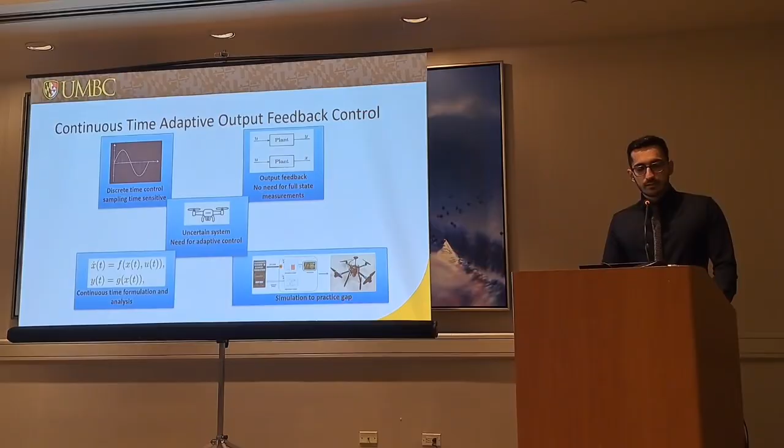So we are dealing with uncertain systems. Discrete time controllers are sensitive to sampling time, and the problem that we have with full state feedback controllers is that we need to have full measurement of the state, while on the other hand, output feedback controllers only require measurements of output.

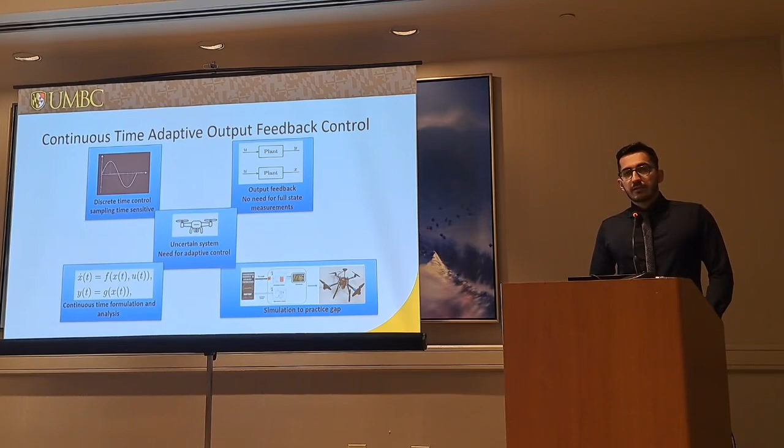Having a continuous time formulation eases the analysis when we have a continuous time model and we want to implement a continuous time controller. And we can also eliminate the problem that arises in the simulation-to-real gap.

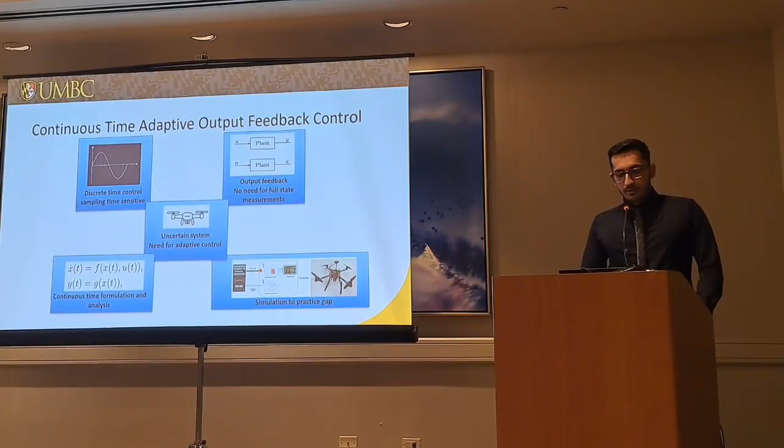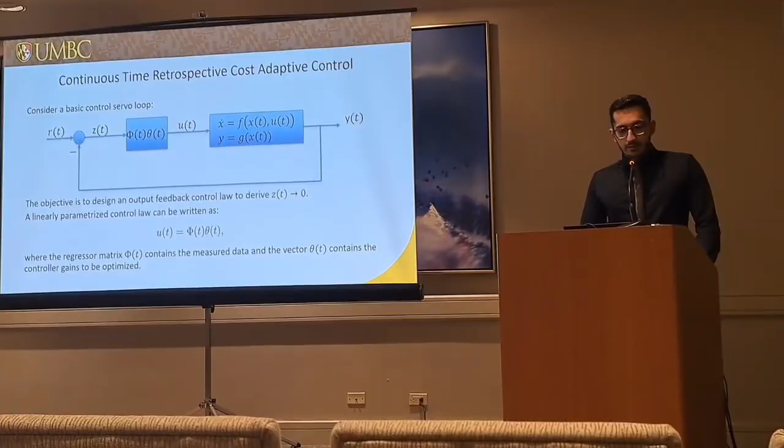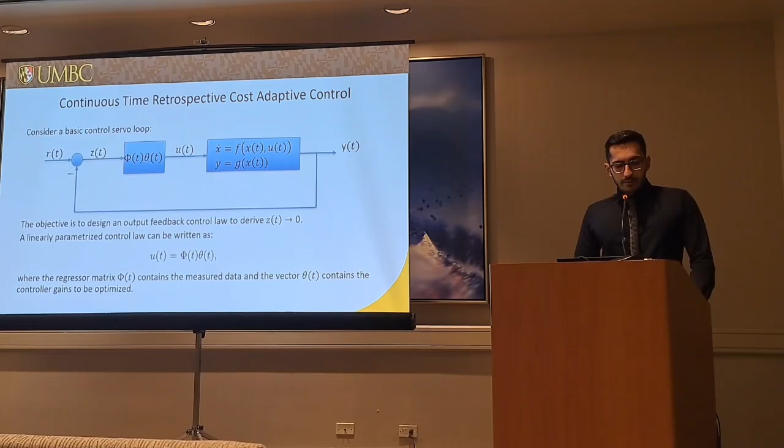So consider a basic control servo loop where we have a plant. The plant is unknown; we don't know the dynamics or parameters of the model, and we want to drive the output of the model to a reference. So here we are defining the reference signal with R of t, and the objective is to bring the error between output and reference to 0.

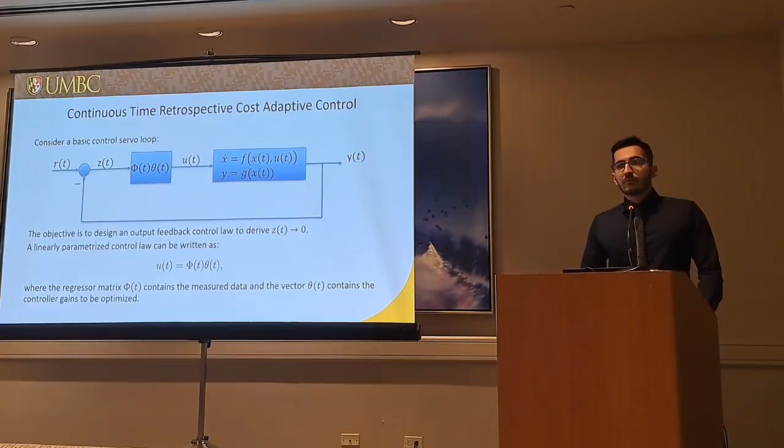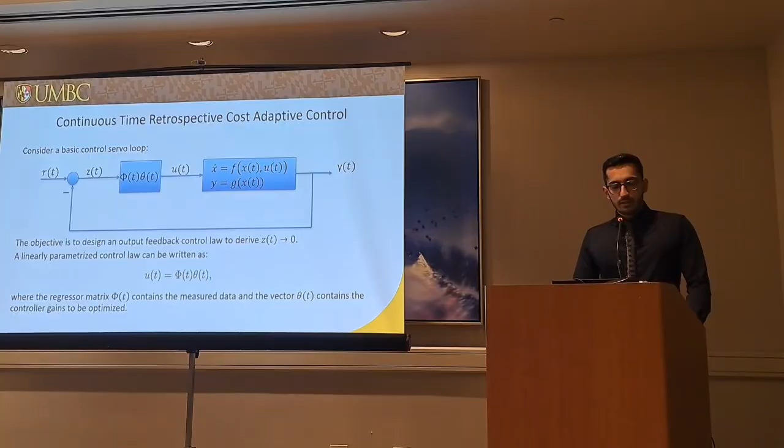And we want to use a linear controller, and any linearly parameterized controller can be written as U of t equals phi of t times theta of t, where phi of t is the regressor matrix, and theta of t is the vector of gains.

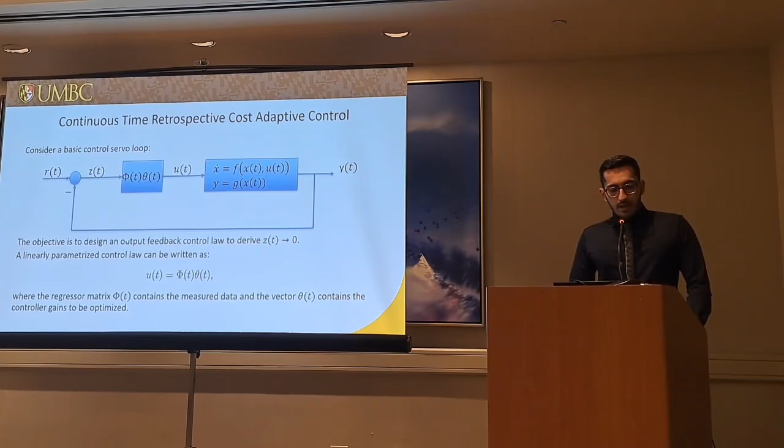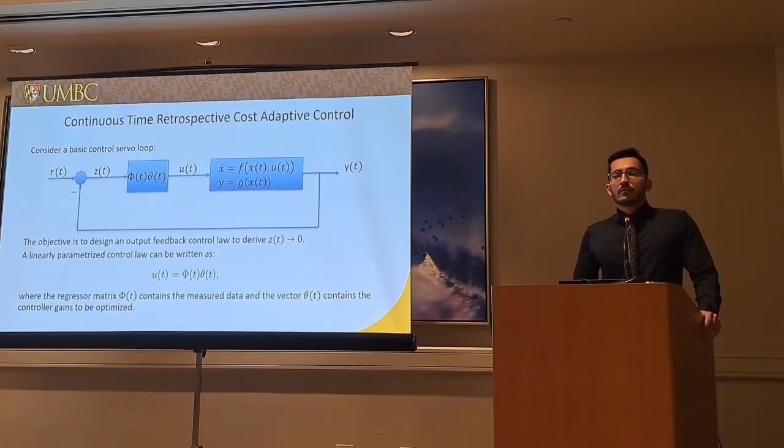So the regressor depends on the controller that we are using, and it can include integrals of output, integrals of control signal. It depends on what controller we're using, and this method is applicable to linear controllers, so we can mention PID controllers, full state feedback controllers, and cascade PI controllers.

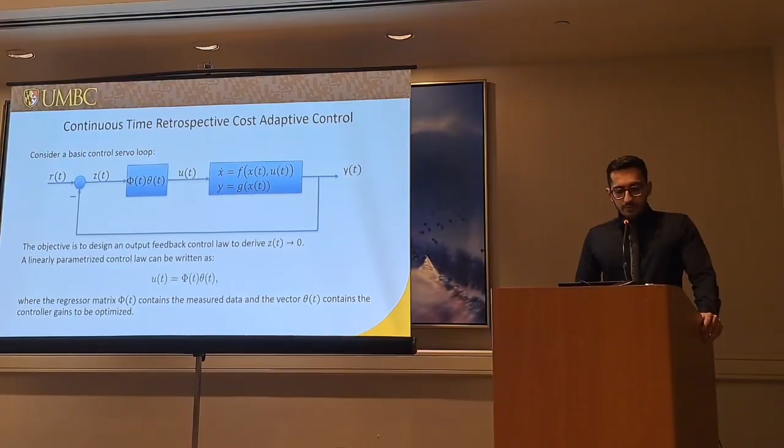So the objective is to develop a continuous time adaptive method that can adapt the vector of gains, theta of t, and the objective is to achieve stabilization and tracking performance.

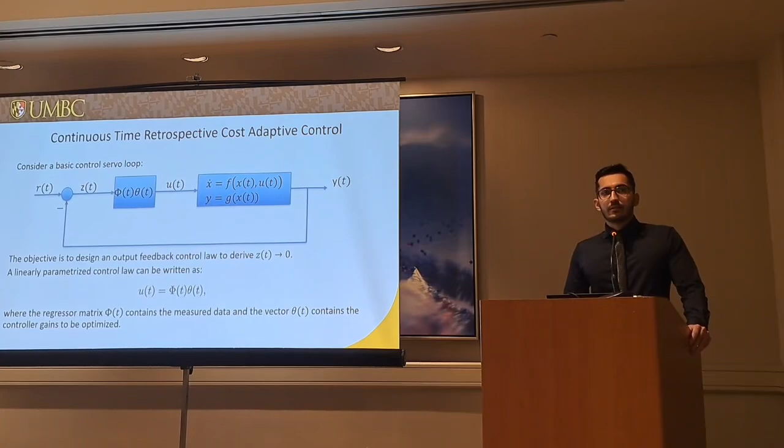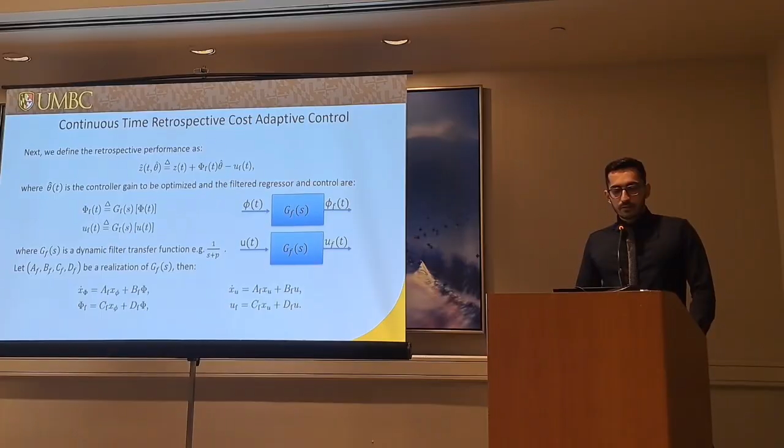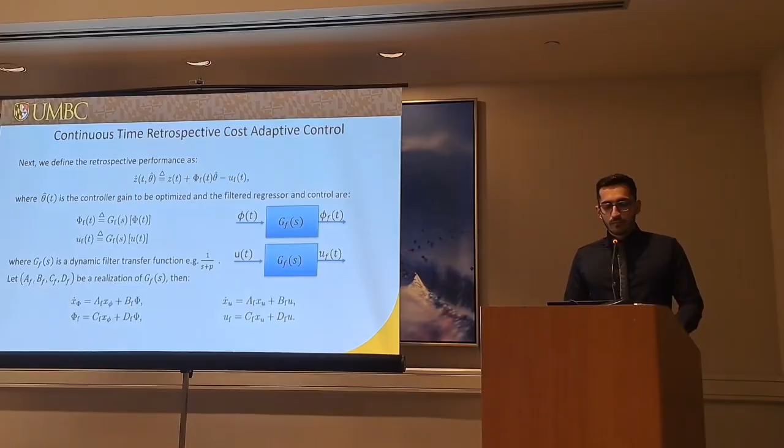Next, we define the retrospective performance variable, which includes the output error, filtered regressor data, and filtered control signal. For filtering these signals, we use dynamic filters like a first order low pass filter or a second order low pass filter, depending on the design specifications that we need.

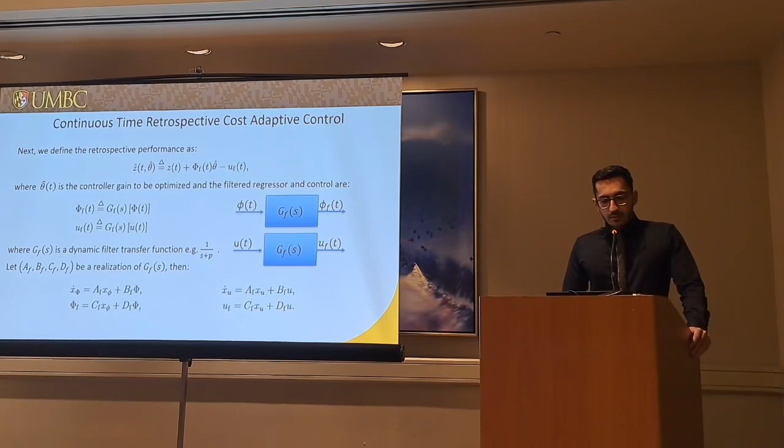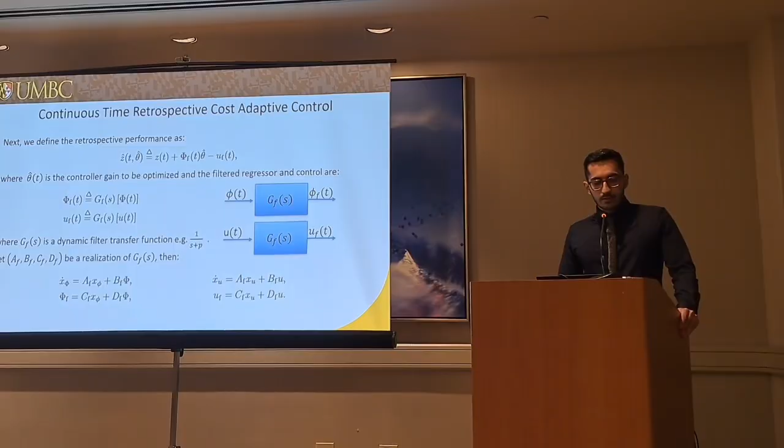So we define the dynamic filter as G_f of s, and we can easily get the state space realization of this dynamic filter. As shown in these equations, we can easily get the filtered regressor data and the filtered control signal.

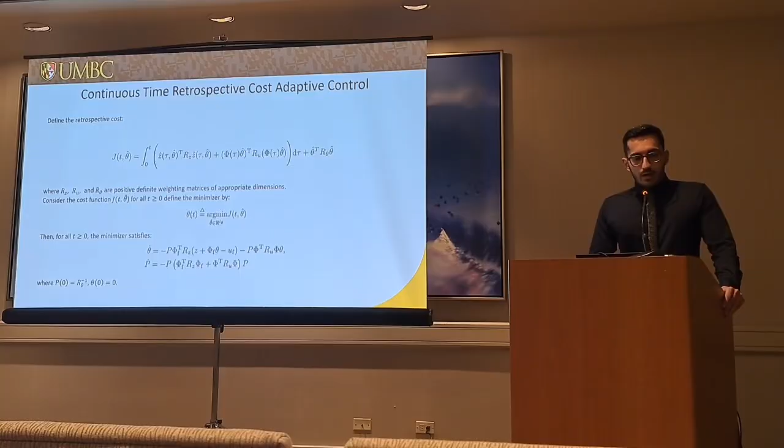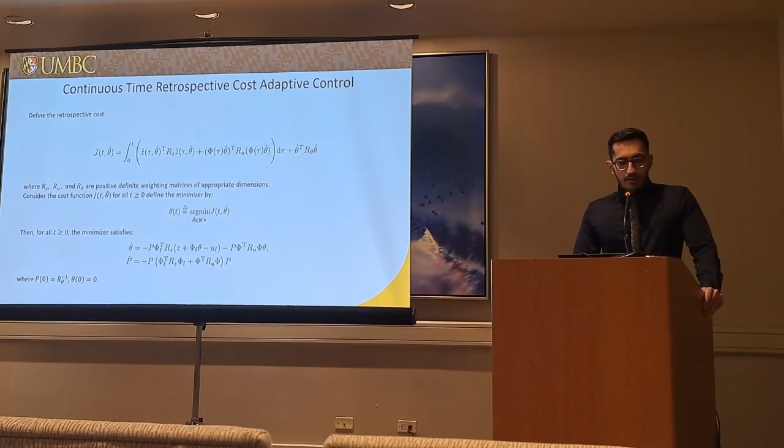Finally, we define the retrospective cost, which is an integral over the output error, control signal, and the gain vector. Here we have positive definite weighting matrices, R of Z, R of U, and R of theta, which are weighting matrices of appropriate dimension.

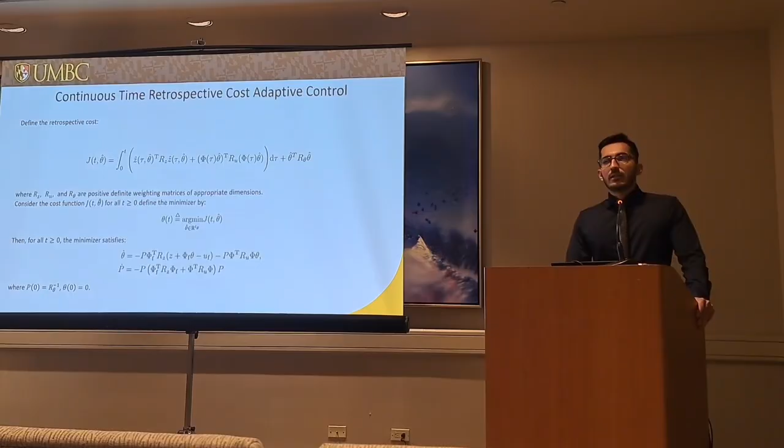So this method is easily applicable to MIMO systems as well. We just need to get the appropriate dimensions for these matrices and the regressor data.

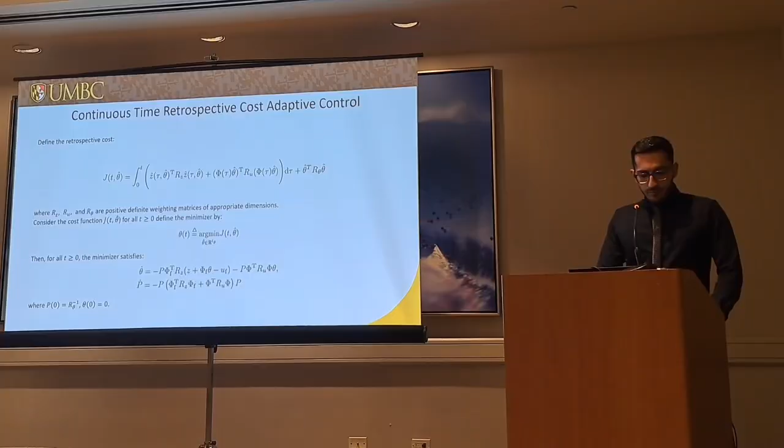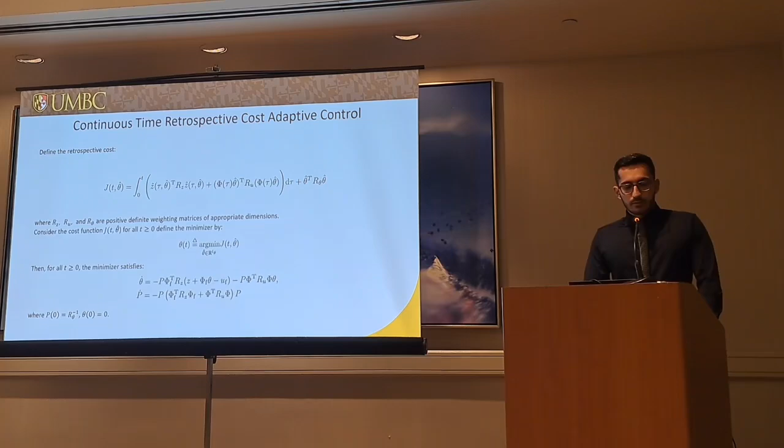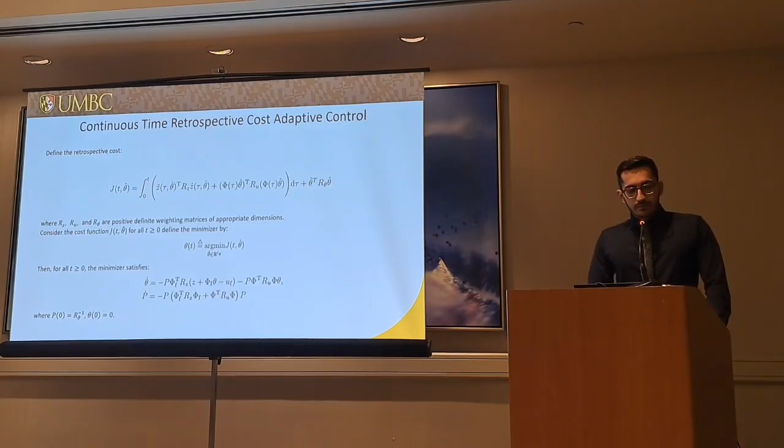So we define the objective as minimizing this cost function with respect to theta of t. Because we are dealing with a quadratic cost function, we can get the closed form solution for the minimizer, and the equations for the minimizer are given here, all in continuous time, so we can have an adaptive control method in continuous time.

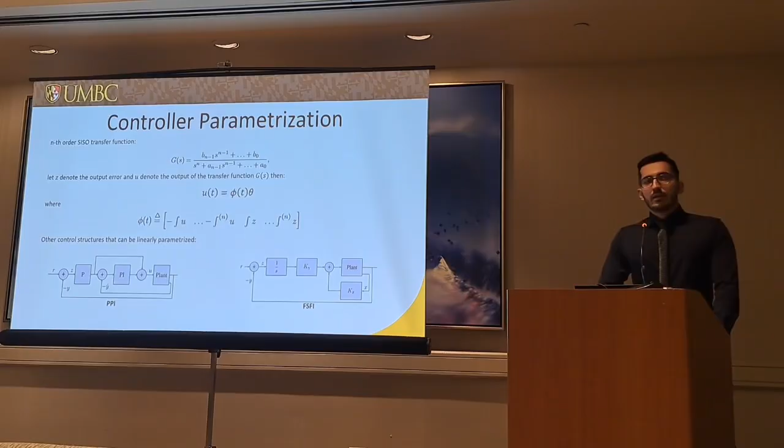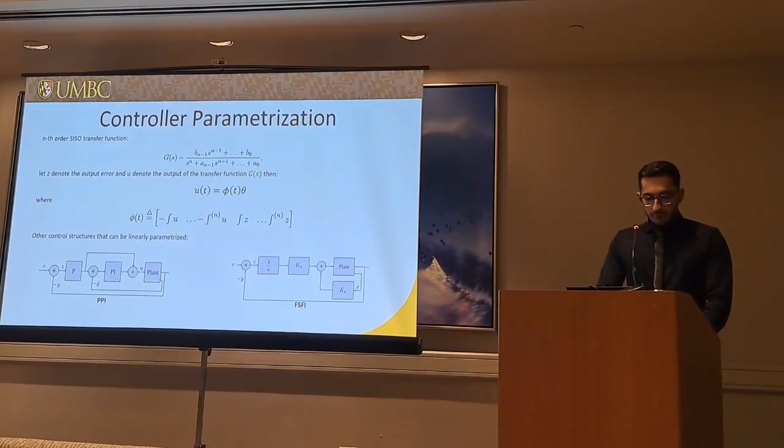As mentioned, this method is applicable to linear controllers, and any linearly parameterized controller can be written as phi of t times theta of t. In this work, we considered nth order transfer functions, PID and PPI controllers, and also FSFI. For the nth order transfer function, the regressor matrix simply becomes integrals of the control signal and integrals of the output error. We also show the structure for the PPI and FSFI controllers, and in each case the regressor can be easily computed.

To validate this method, we first implemented it on a double integrator. This system is quite simple yet fundamental in controls, because most robotic applications, with some assumptions, can be simplified to just a double integrator. For example, for a quadrotor, if you assume the rotational dynamics are much faster, we can assume the translational dynamics to be just a double integrator. So the objective here is to bring the output of the system, which is position, to a reference signal - we just want to follow a unit step command.

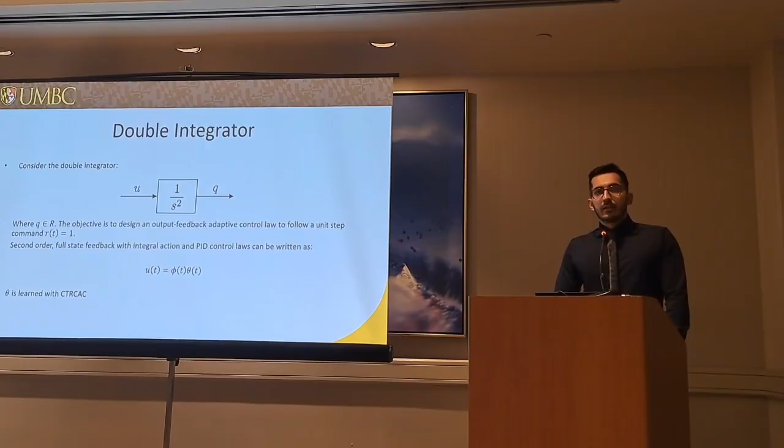We considered second order full state feedback with integral action and PID control laws, each of which can be written as shown here. The gain vector needs to be learned with the algorithm called continuous time retrospective cost adaptive control, abbreviated CTRCAC.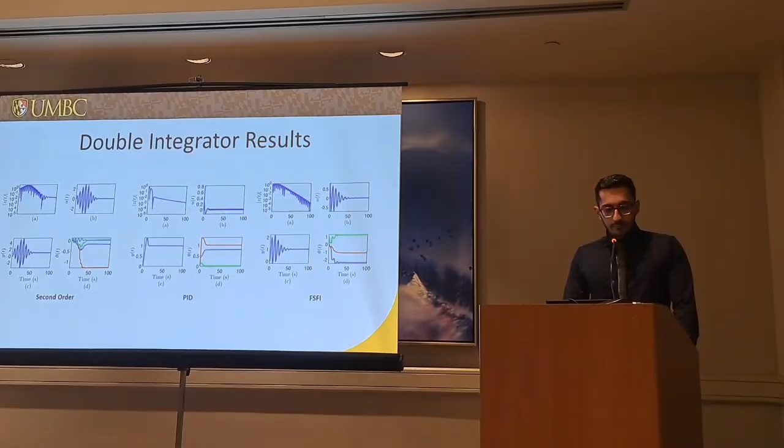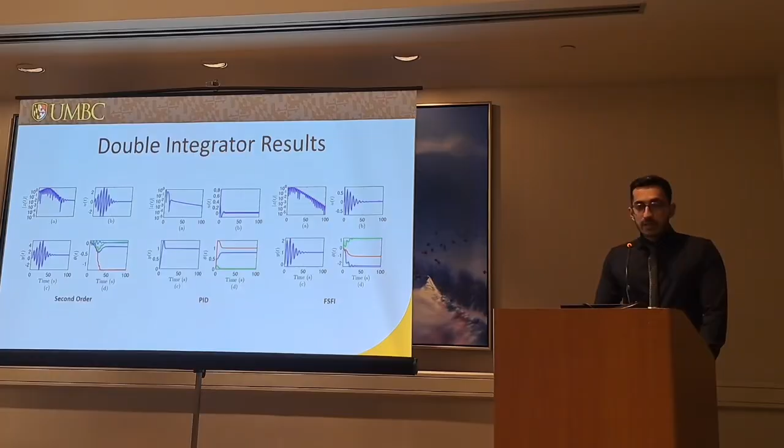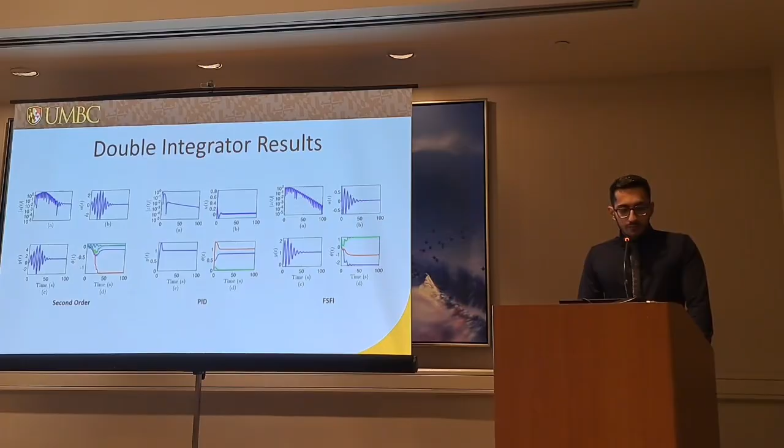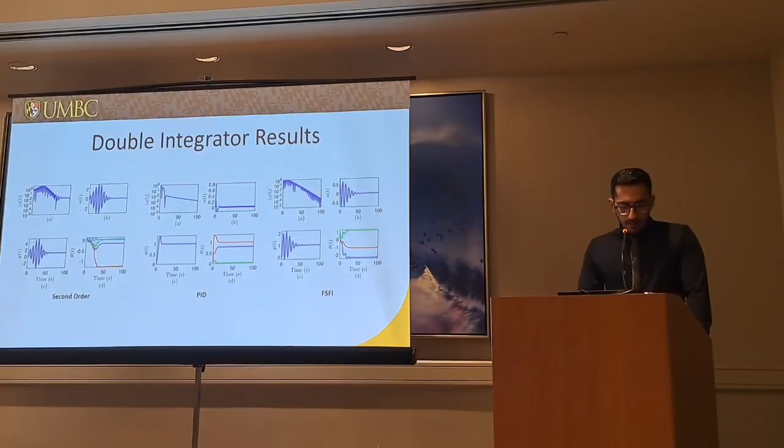Here we're showing the simulation results. The figure on the left shows results for a second order controller. As you can see in figure D, all of the gains are initialized at 0, and we don't have any knowledge of the model parameters. The objective is to bring the output to a unit step. Figure C shows the output, figure A shows the output error in logarithmic scale, and figure B shows the control signal.

In the middle, we have the results for the PID controller. Again, the same scenario: all gains are initialized at 0, and the objective is to bring the output to a unit step. We are showing the control signal and also the output error.

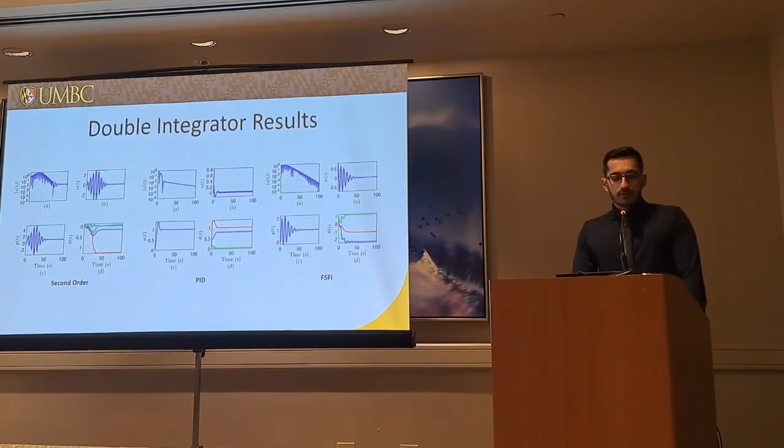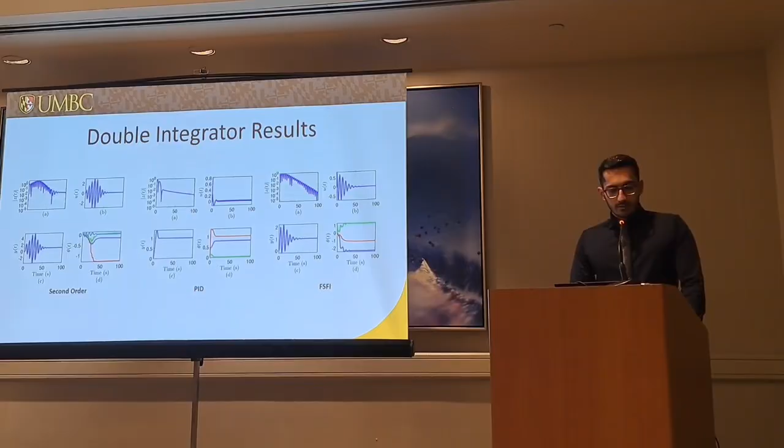The figure on the right shows the results for FSFI. As you can see, some controllers may yield better performance. Some of them may get to stabilization in less time, and in some cases they require much more time.

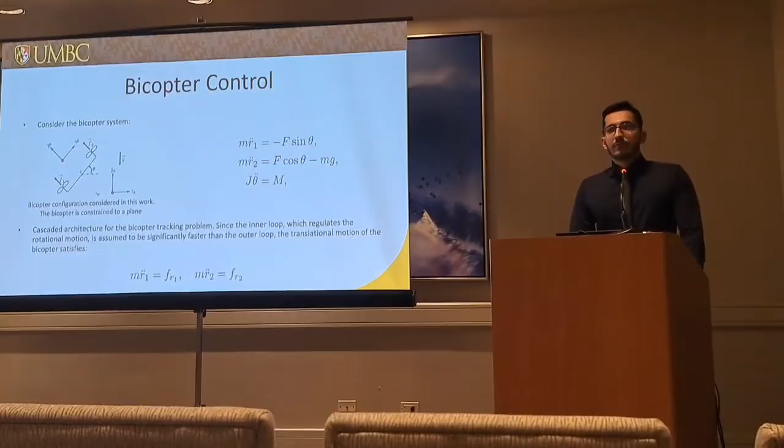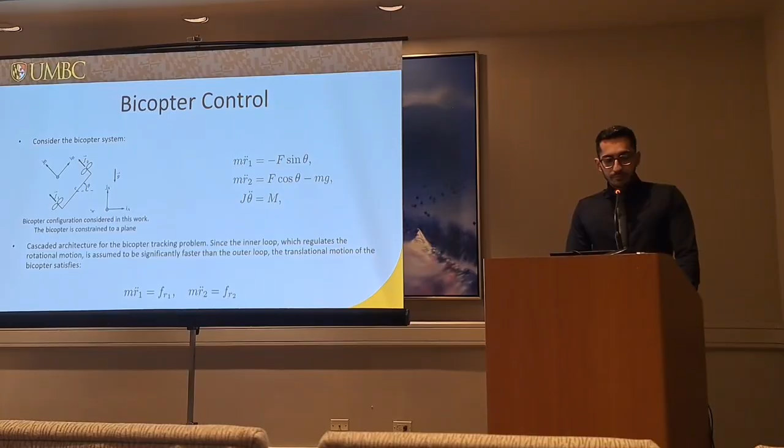Then we move to the bicopter control problem. By bicopter in this work, we mean a simplified quadrotor. If we assume a quadcopter confined to a 2D plane, we can simplify the system to a bicopter, and the equations of motion are given here. For the flight controller, we consider a conventional cascaded architecture with an inner loop and an outer loop. If we assume the inner loop, which deals with the rotational dynamics, is much faster, we can simplify the translational dynamics to just double integrators.

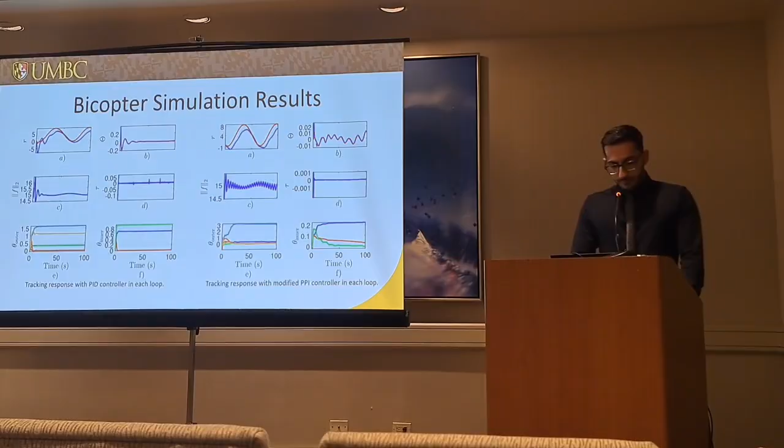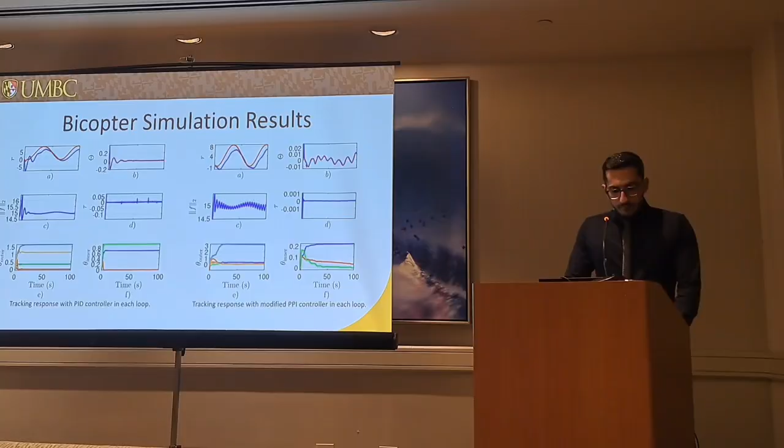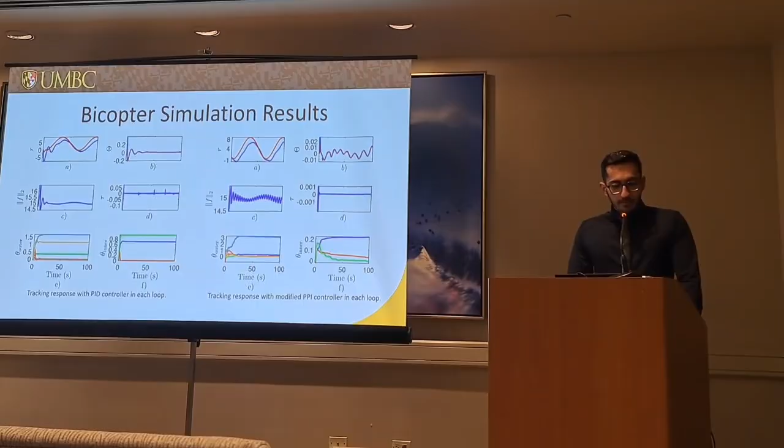For the simulation results, we want our bicopter to follow harmonic commands. The figure on the left shows results for a PID controller. The objective is for the position of the bicopter to follow a harmonic command. In total, we have 9 gains that need to be learned: 2 controllers for the position and 1 controller for the inner loop.

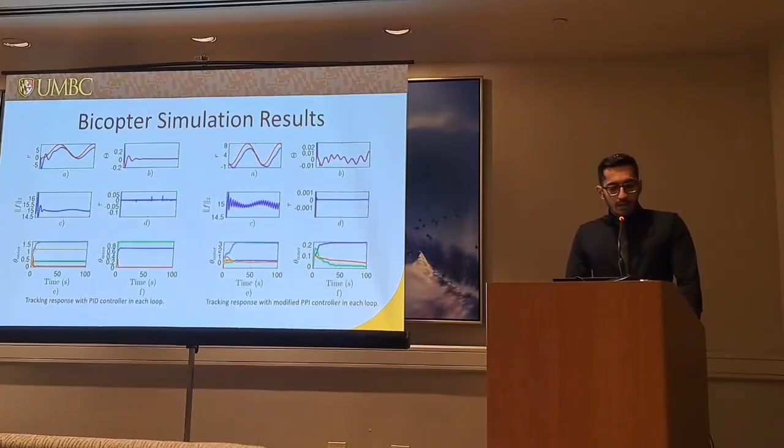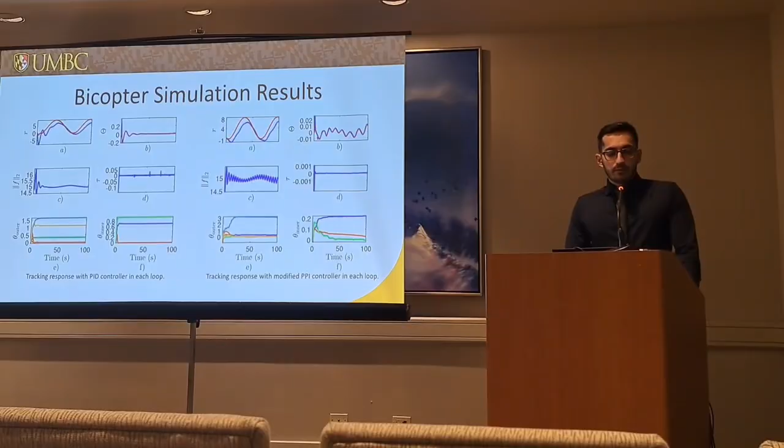Each controller is a PID controller, so in total we need to learn 9 gains. All of the gains are initialized at 0, and we don't have any knowledge of the parameters of the bicopter, which are its mass and moment of inertia.

The gains are being updated in continuous time, and the position is following a harmonic command.

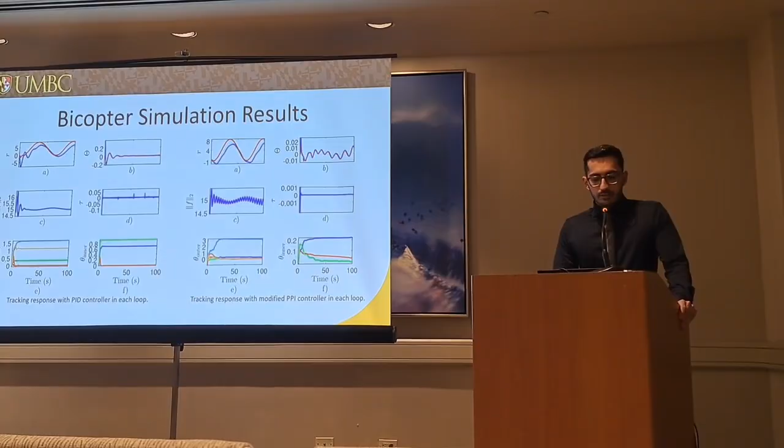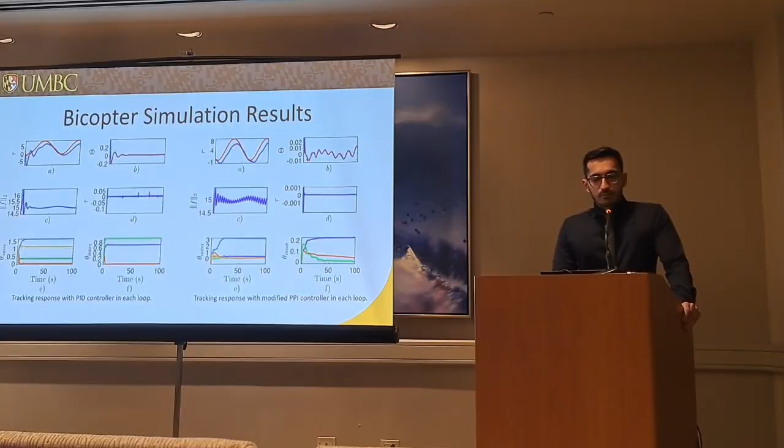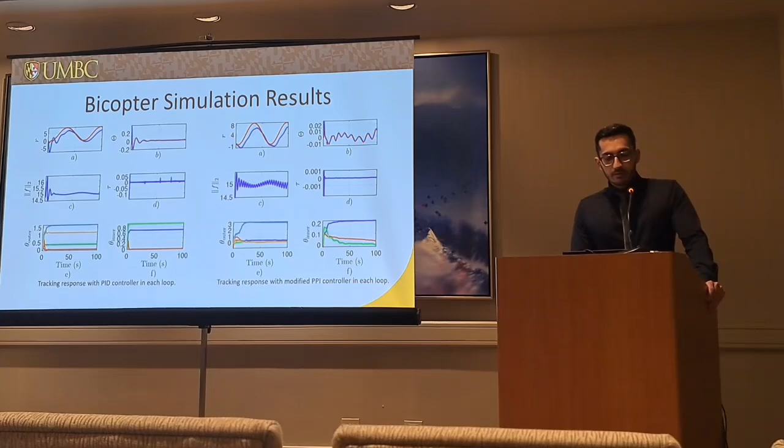The figure on the right shows results for a cascaded PPI controller, widely used in quadrotor applications and other aerial vehicles. In this case, the same scenario applies: we want to follow a harmonic command for the position of the bicopter, and the gains are all initialized at 0. We have 9 gains and 3 PPI controllers: 2 PPI controllers for the position of the bicopter, and 1 PPI controller for the inner loop, which regulates the angle of the bicopter.

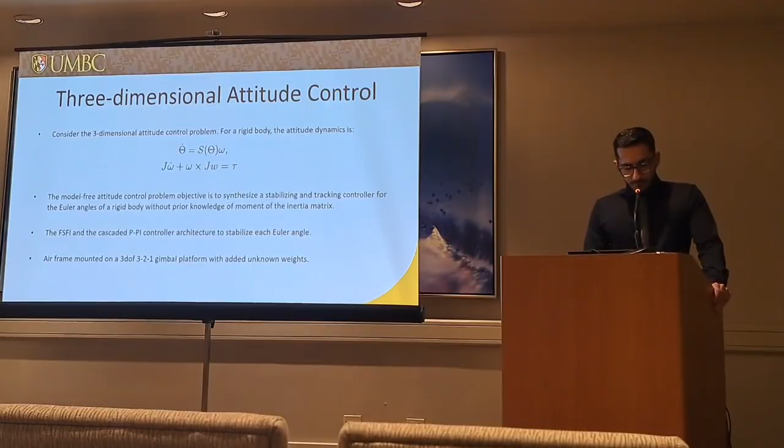Then we moved to the 3-dimensional attitude control problem, considering a rigid body whose dynamics are given as shown. The objective is to design a model-free attitude controller without knowing the moments of inertia, using a linear controller for attitude stabilization.

In this case, we consider the FSFI and cascaded P-PI controller architecture to stabilize each of the Euler angles.

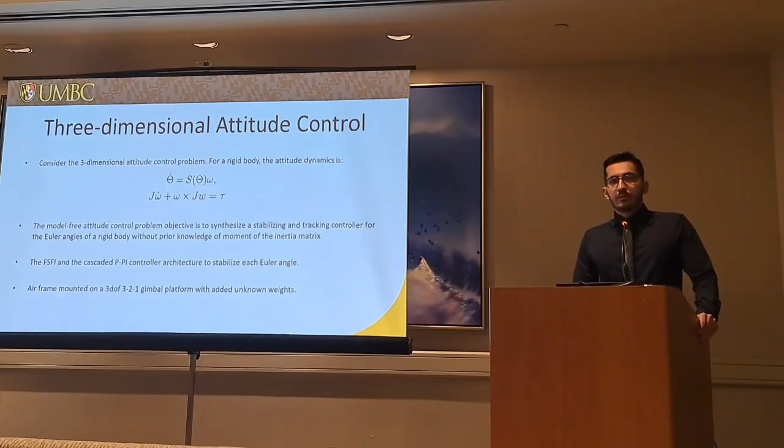Because we also wanted to validate the method experimentally, we considered an experimental setup: an airframe mounted on a 3-2-1 gimbal platform, with unknown weights added to act as disturbance and introduce uncertainty to the system. The objective is to regulate the Euler angles.

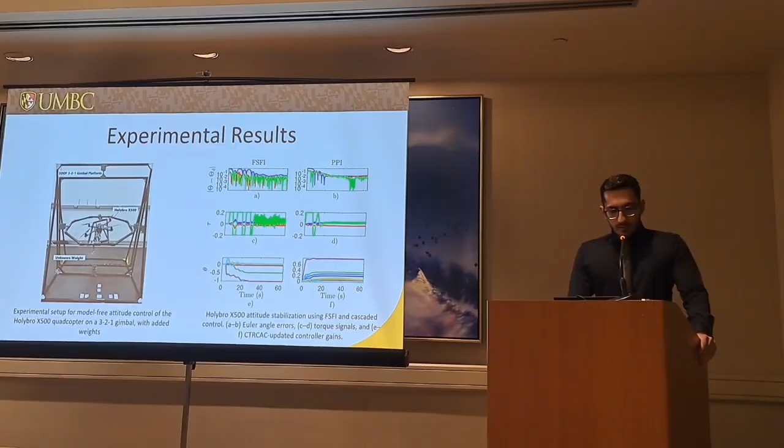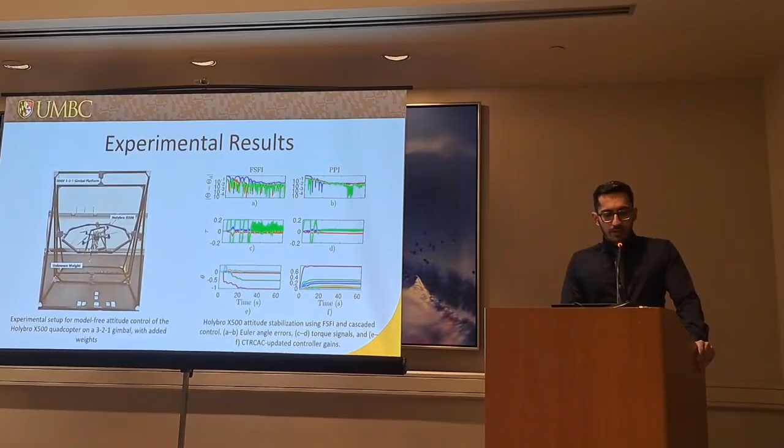The experimental setup is a 3DOF, 3 degree of freedom gimbal platform. We have a quadrotor mounted on this system, and it can freely move with 3 degrees of freedom: roll angle, pitch angle, and yaw angle.

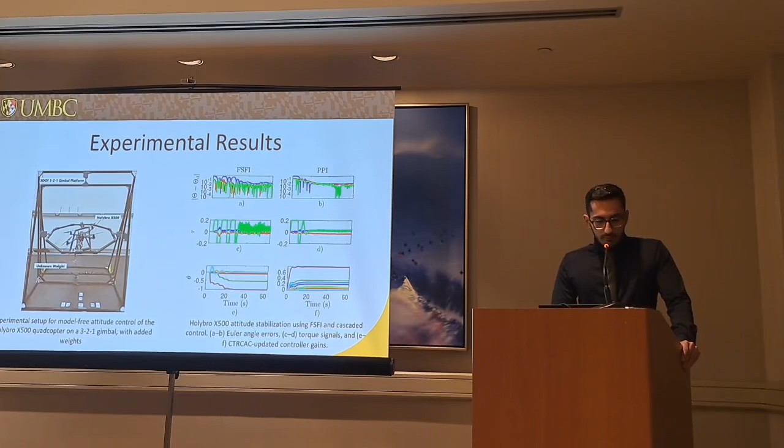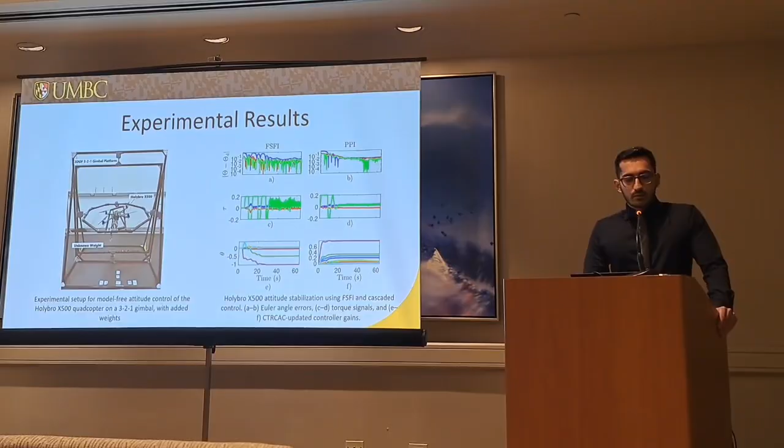There are also weights added to each of the axes, acting as unknown weights. The moment of inertia is unknown, and we want to use the adaptive control method developed in this work on this system.

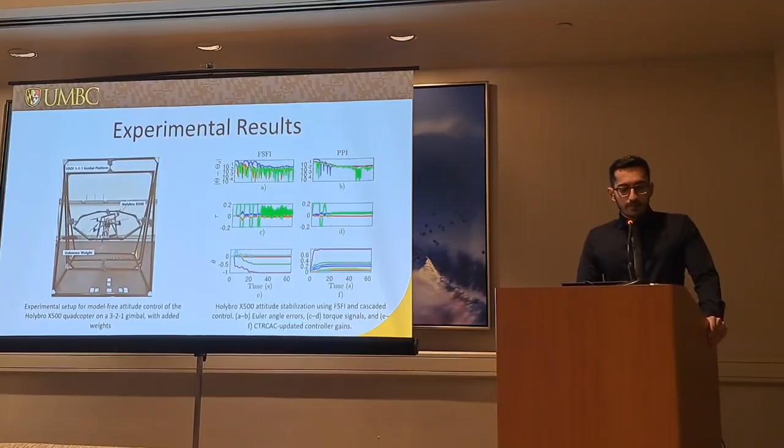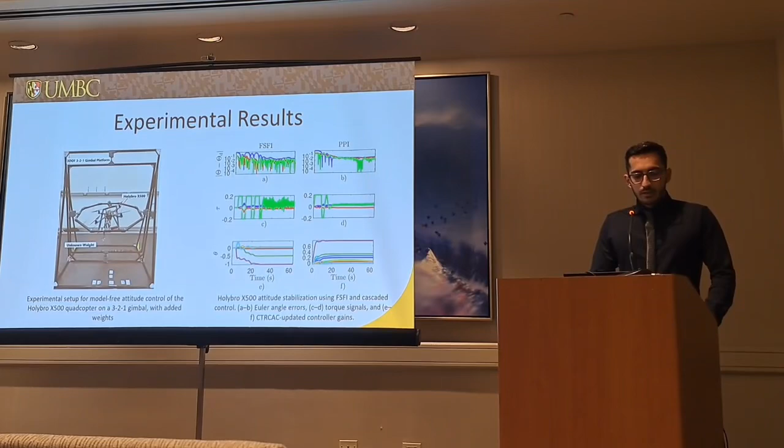For measurements of the attitude of the quadrotor, an IMU is used. We use a PixHawk flight controller that provides the attitude measurements for the quadcopter, and the continuous-time adaptive method is implemented on the PixHawk flight controller.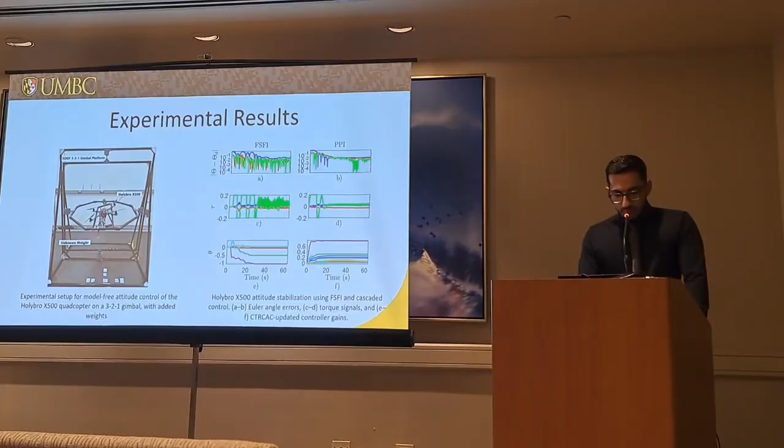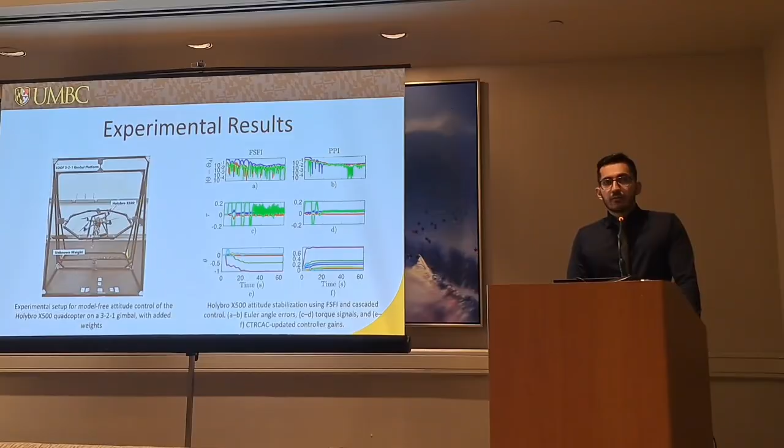We have experimental results here. The column on the left shows results for the FSFI controller. The first figure shows error in Euler angles on a logarithmic scale for the 3 axes: roll, pitch, and yaw. Figure C shows the control inputs.

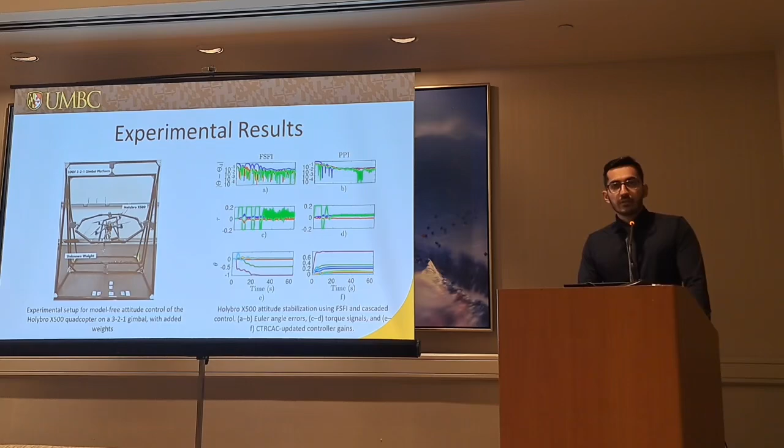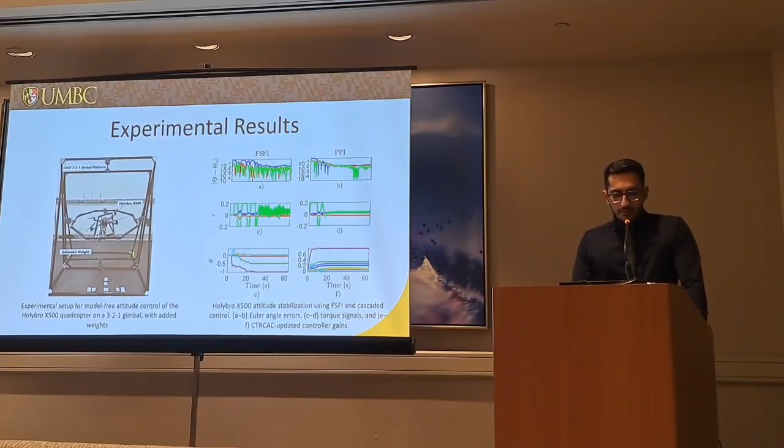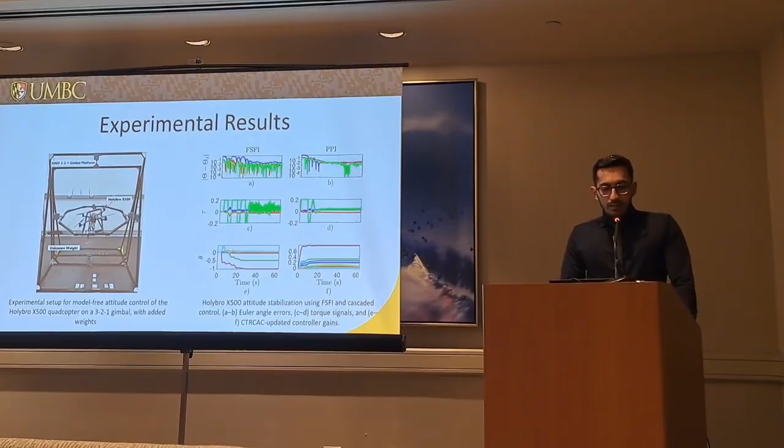We have 3 moments applied to the quadrotor in each axis, and figure E shows the gains being updated in continuous time; all gains are initialized at 0. We have 3 single-input single-output controllers, and each has 3 gains that need to be learned.

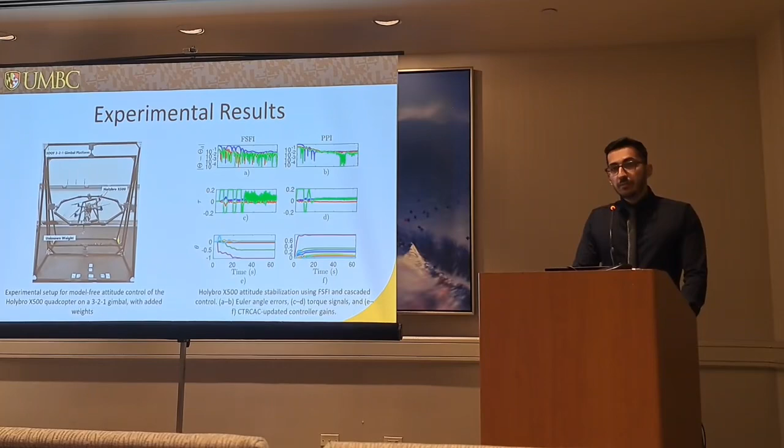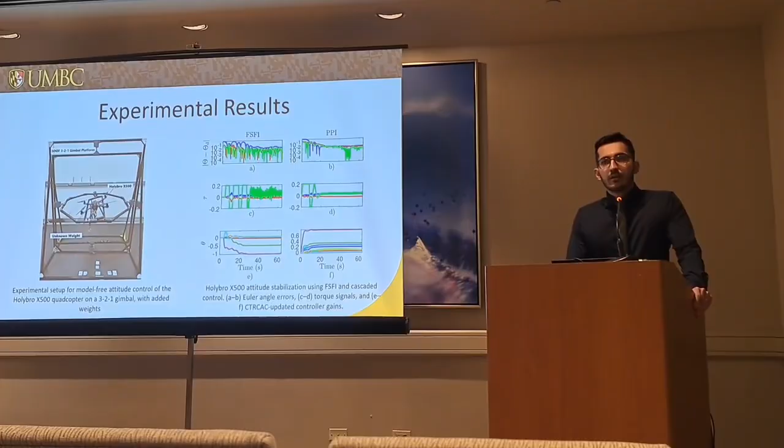The figure on the right shows results for a PPI controller. PID controllers in general for aerial vehicles yield better performance because we have measurements of both position and velocity, so we can have a cascaded PPI controller, which gives better performance.

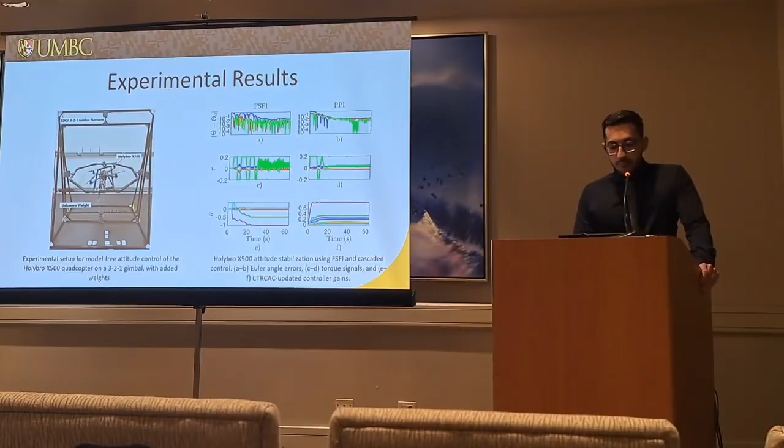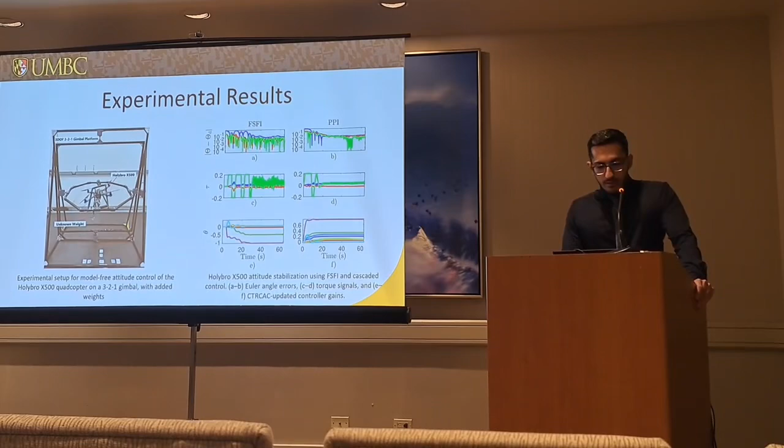Figure B shows output error on a logarithmic scale. Figure D again shows the control signals; we have 3 moments that need to be applied to the quadrotor. Figure F shows how the gains are updated and learned, with all gains initialized at 0.

Here I have some videos of the experimental problem. The quadrotor is initialized with some initial error on the Euler angles, and unknown weights are added, so the controller needs to learn to stabilize the attitude of the quadrotor.

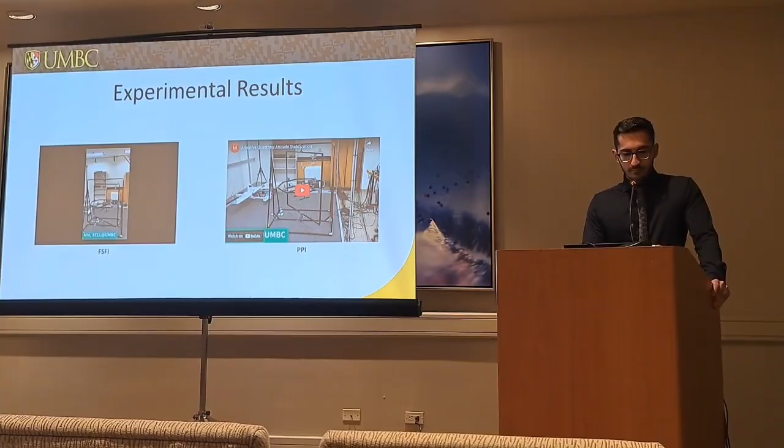After some time, the gains are learned, and the controller is able to stabilize all 3 Euler angles. We also have the PPI controller results, with the same scenario: some initial error on the Euler angles, and the adaptive controller tries to learn the controller gains to stabilize the quadrotor. The PPI controller seems to yield better performance.